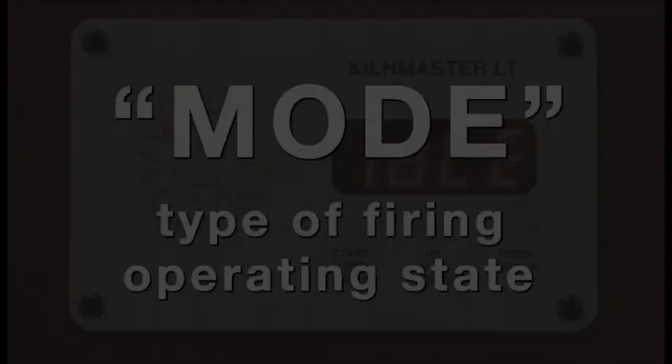Idle mode. This is where the display is flashing idle alternately with the current temperature of the kiln chamber. When in this mode, the kiln is waiting to be programmed. Ready mode. This is where the kiln is ready to be fired. There is a program loaded, and if you press start, the kiln will run the program. It will flash ready. The last is live mode.

This refers to when the kiln is firing. When the kiln is firing, it will only display the current chamber temperature unless the program is in a hold. In this case, it will show the amount of hold time remaining alternately with the current chamber temperature. While in live mode, there are certain advanced features available that allow you to change the program on the fly. Consult the live mode section of your manual for instruction on using these advanced features.

Using the keys. There are three keys on your controller. As you can see, they are labeled according to their function. The first button is used to start, stop, and select or enter. Use this button to start programming the kiln, start firing the kiln, stop firing the kiln, or to enter a selection you have toggled to using the up and down arrow keys.

The up and down arrow keys are used mostly to toggle through menus and navigating to the correct temperature and time values, but they also have some special functions. The up arrow may be used while the kiln is firing or in live mode to see what segment of a program the kiln is currently firing, and the down arrow can be used while the kiln is in ready or idle mode to review the program currently programmed in the kiln.

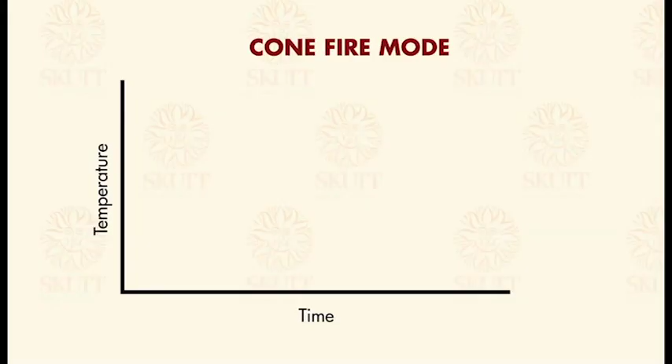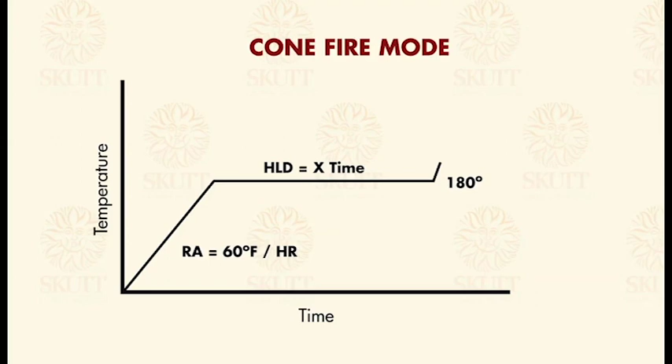It is very important to make sure your clay is completely dry before you fire it. Water still in the clay will want to escape as steam when it reaches 212 degrees Fahrenheit and could damage your piece. If you are not sure if it is completely dry, you can set a preheat time, which brings the kiln very slowly up to 180 degrees Fahrenheit and holds it there for as long as you tell it. It will then begin the program you have entered. A 2-hour preheat is usually adequate for most pieces of the size that could fit in your kiln.

A good way to check if your piece is dry is to hold it up to your cheek. If it feels cool, it probably still has some moisture in it. It is important to note that you should not use preheat to dry out very wet pieces, since the moisture is not good for your elements or band.

The next question it is going to ask you is, what cone do you want to fire to? Every clay body and glaze has a recommended cone value. Cone refers to pyrometric cones, which measure heat work in your kiln. If you are unsure of the cone value, consult an expert before you continue.

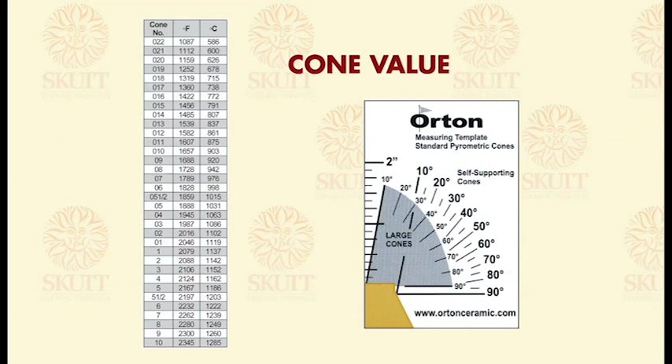Cone values with a leading 0 fire much cooler than cone values without them. For example, a cone 06 fires to approximately 1828 degrees, whereas a cone 6 fires to 2232. To select a cone value, use the up and down arrows to scroll to the cone value you want, then press enter.

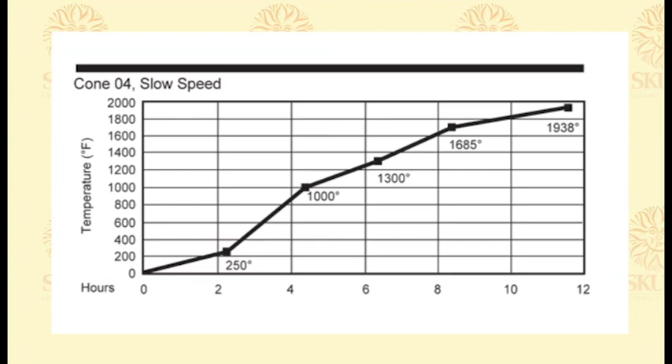The next question it will ask you is what speed you would like to select. Depending on the cone value, a slow firing will take about 12 hours. Slow is recommended for all of your bisque firings. Medium speed will take approximately 7.5 hours. Medium is recommended for all your glaze firings.

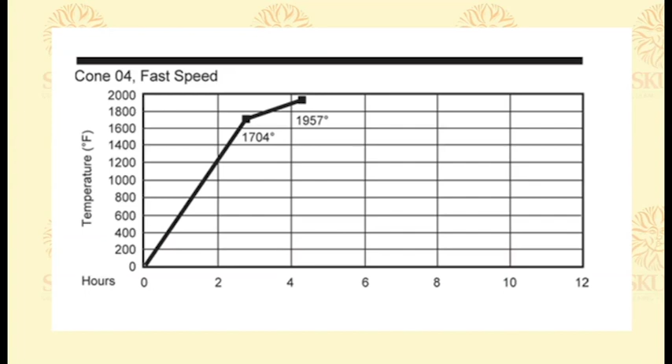A fast firing will take around 4.5 hours and is only recommended for firing lusters and decals. To select a firing speed, use the arrow keys to toggle to the desired speed and press enter. The last question it will ask you is if you want to hold at a peak temperature.

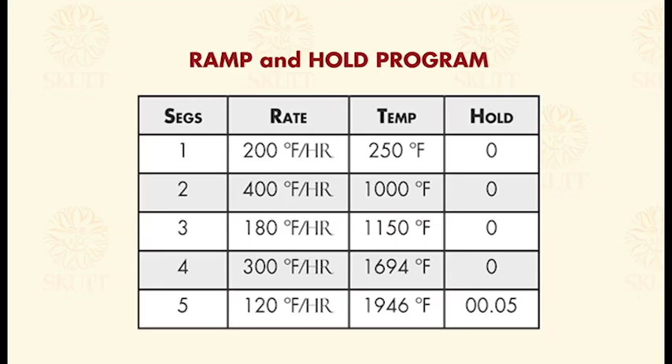A 5-minute hold time is often recommended to allow the kiln to balance out and for glazes to flow. We rarely recommend holding for more than 20 minutes. To enter a 5-minute hold, use the arrow keys to select the time value and press enter. It is very important to remember that everything to the right of the decimal is minutes and everything to the left is hours. A 5-hour hold time could seriously damage your kiln.

Once you have entered a hold time, the kiln will go into ready mode, meaning it is ready to start. Before you start, it is a good idea to press the down arrow and review the program you have entered. If it is correct, press the start key to start the firing. We recommend that you do not leave the kiln unattended for too long and always be there when it is scheduled to turn off.

When the kiln is done firing, it will beep 14 times and the display will read complete, or CPLT, alternately with the current temperature of the kiln and the amount of time it took to run the program. It is a good idea to keep a log of each firing that lists the program and the firing time and how the ware turned out.

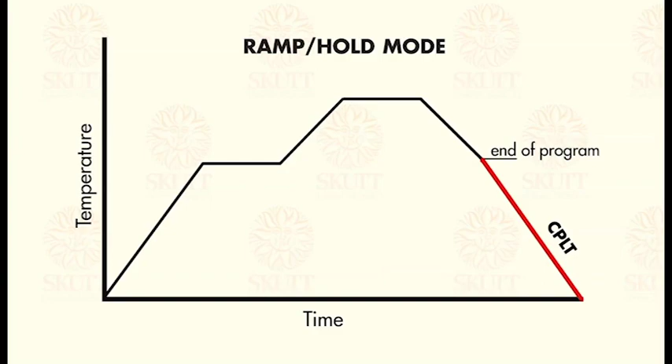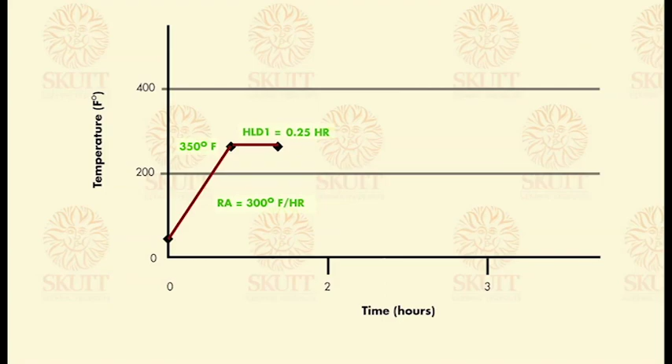When the firing times start to take longer and longer, it is a good indication that your elements will need replacing soon. Remember, just because the kiln says the firing is complete does not mean the kiln is cool. Watch the temperature and unload it when it is cool enough to unload, or around 130 degrees Fahrenheit.

Glass fire mode. Like cone fire mode, glass fire mode allows you to fire your kiln without having to know how to write a firing program. Just give it some data and the controller will run the correct program for your fused, slumped, or tack fused piece. Glass programs differ from standard ceramic firing programs because they also control the cooling side to anneal the glass.

Skutt's preset glass programs are designed to work with the two most popular types of fusible glass, COE 90 and COE 96. Fusible glass is specifically designed to be compatible. Never use 90 with 96 and always use glass specifically designed for fusing.

Use the Fuse program when you want to melt 2 or more layers of compatible glass completely together. Use the Tack program when you want to heat 2 or more layers of glass just to the point where they stick. And use the Slump program when you want to soften the glass to the point where it will slump into or over a mold.

To enter a glass fire program, begin by pressing Start from idle mode, then toggling to Glass or GLAS with the arrow keys and press Enter. The first question it is going to ask you is what speed you want, slow, medium, or fast. Projects that are large in diameter or have multiple layers of glass need to fire slower than smaller, thinner projects.

Use the chart in your manual to select the speed that is correct for your project. Then use the arrow keys to toggle to the speed you want and press Enter to select it. Next, it'll ask you to pick a process, slump, tack fuse, or full fuse. Use the arrow keys to toggle to your selection and press Enter. The kiln will go into ready mode, meaning it is ready to start.